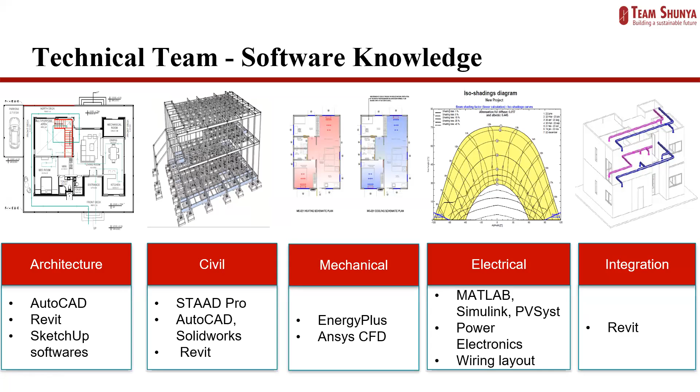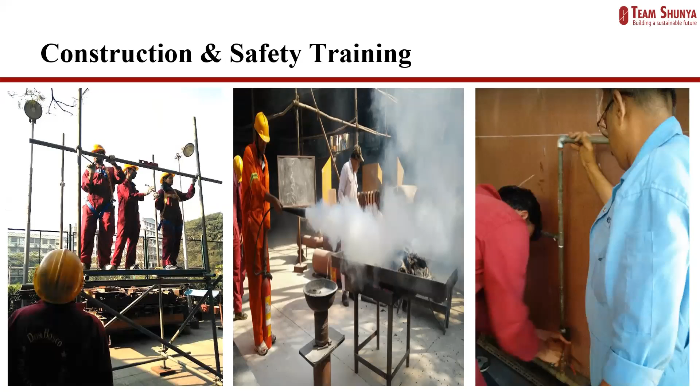And then we run a simulation of the same. Once the simulation part is done, the team members go through construction and safety aspects. Here we can see the implementation part: once the simulation is done, how the construction proceeds and what safety measures need to be taken.

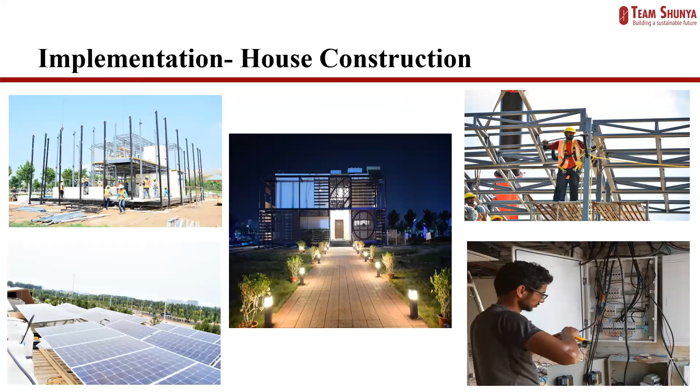The best part of the project is the construction part, and we can say the best experience comes through this particular aspect. Here we see the construction of the 2018 model which we had created.

The next slide will give you a little bit more technical insight on how this evolution has taken place. Early on, our ancestors had a sort of a nest structure.

Basically working on stone and stone tools. Then slowly the evolution moved into using wood, which is a replenishable item - you can still grow trees, right?

So the wooden frames were able to come in a large way, but along with it, you have the dangers that it is susceptible to fire. And it is highly damageable, and it may become unstable over a period of time.

But still, even today, you find wooden structures - they have excellent insulation properties, by the way. And then it evolved to the wooden beam structure, where science and technology gave certain clear cut components to the wood.

Then moving on, you have a combination of masonry and wood structure. Again, it is susceptible to fire, it is again susceptible to damage, it may become unstable in a fire.

Further on, the advent of the steel industry, it's a steel structure and reinforced concrete structures, they all came, right? So you have the mechanized way of construction.

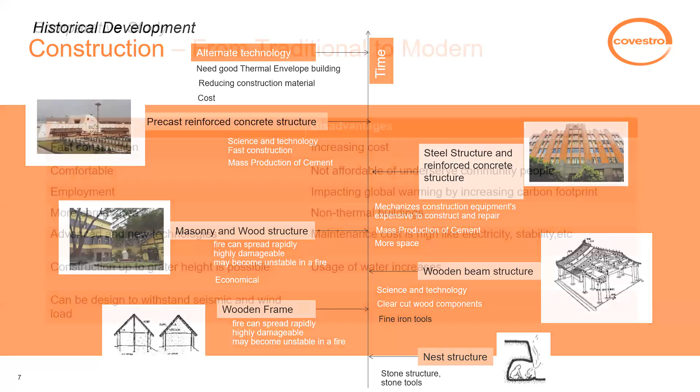So we have also the employment. You need to employ industry. We need to also have a trade-off between high employment and also efficiency. We need more carpet area, value for money, and we also need such advanced new technologies, make things faster, speed of construction, lightweight, and energy efficiency.

Can we have high constructions, high-rise buildings because space is a constraint in urban situations? And can we design to also have the ability to withstand natural disasters which are coming more and more in climatic changes, seismic, wind load, etc.

What are the disadvantages? You have to pay a cost for having these advantages. So the increased cost is there, not affordable to serve those communities which are at a disadvantage themselves. The increasing cost actually excludes certain sets of people, and those people are actually stuck. They're not becoming inclusive in the development of cities, the development of nations.

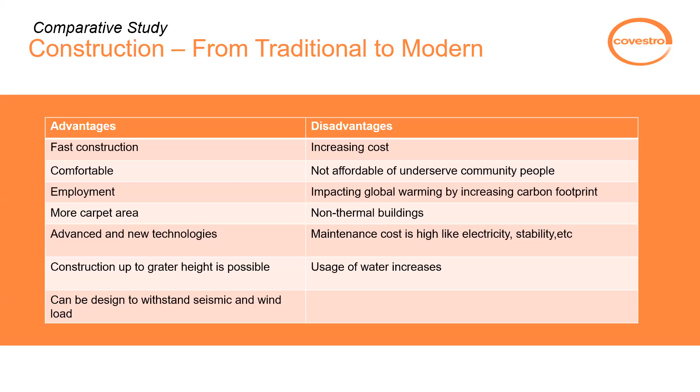So how do you manage this? How do you actually work around this at the same time meet the goals of health and well-being, of sustainability, of functionality, of digitization and customization? These are the questions which alternate technology has to answer. Moving to the next slide.

I'm sure all of you know there is a need and a trend towards life cycle thinking. It is not that the initial cost is what really matters in the life of a building. There are two facts you must remember: the average life of a building in India is less than half that of buildings in Western and more developed nations. That's a very sad fact.

Secondly, this second fact is universal: the initial cost of a building is just 10% of the total life cycle cost of the building. So 90% of the cost comes from operation and maintenance, during the 25, 30, 35, 40 years of its life.

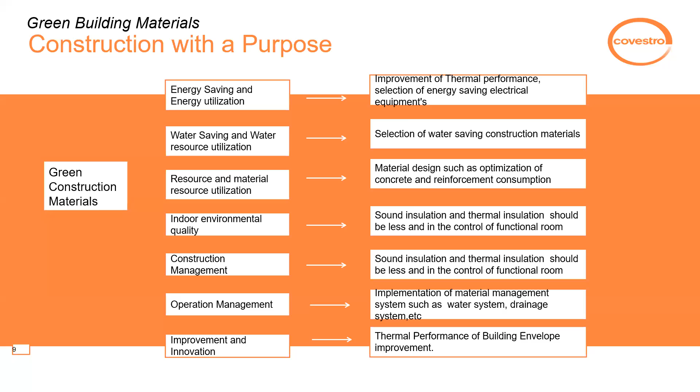Moving on to the next slide. Let's remember, buildings account for 40%, and today the trend is even more—it's touching 50% of the entire global energy consumption. This is a very sobering fact. It makes us think very seriously.

Nearly 50%, that is close to about 42 and more than 42 billion tons of energy units, going into global energy consumption. It is a very sobering fact, and we need to do something about it. When we are building homes and cities, are we generating, operating, and destroying life? We don't know. So let's answer the question.

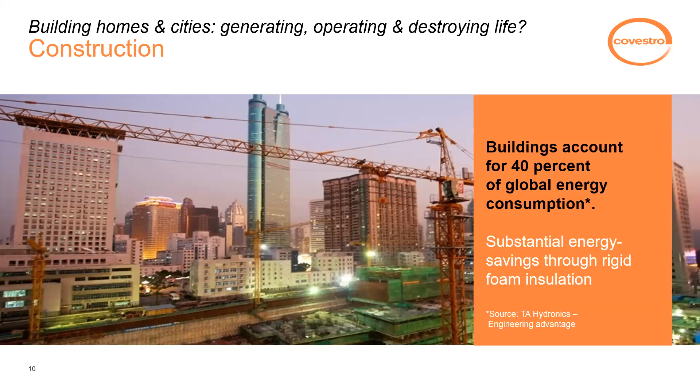Building on the challenges, you have climate change, energy shortage, urbanization, infrastructure need and requirement. For a simple building like what you see here on the right, even a single story building, the HVAC—heating, ventilation, and air conditioning—requirement is more than 50%, nearly 55% of the energy requirement of the building. So where do we actually start making solutions to these challenges, which are sustainable, environmental friendly, and also economic?

So the whole solution goes towards making your buildings address this. We need to have energy savings, enhanced comfort, increased occupant health, and at the same time we need emission reduction. Moving on.

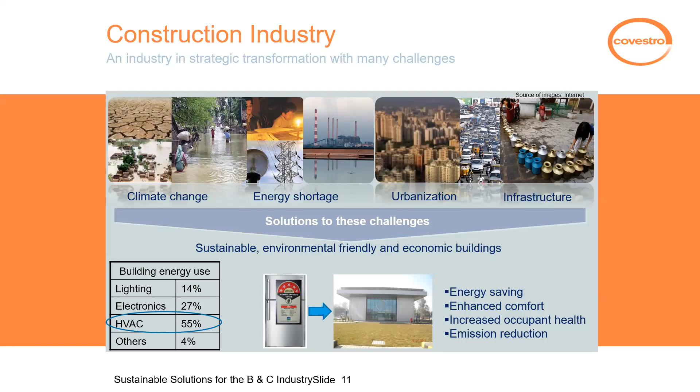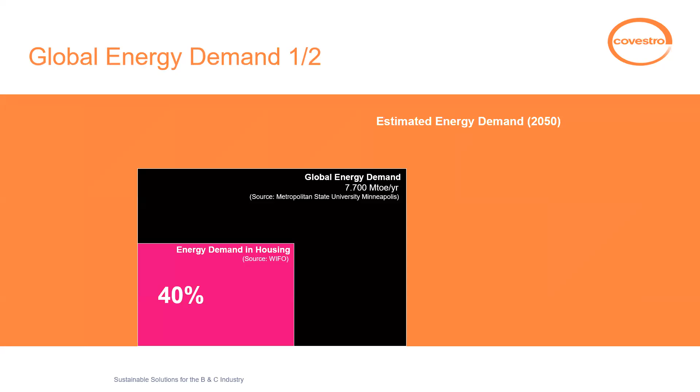This gives you a little more detail on the energy demand. The global energy demand is 7.7 million tons of oil equivalent, and 40% of it is coming from the construction industry alone. In 2050, the next slide will give you how great this demand is going to be.

So there are various solutions available. Insulation is one of the very important solutions. You have heat coming in from the ceiling, coming in from the walls, coming in from the floor, and therefore you need certain materials which can give you savings in terms of the ingress of energy into the building. It's an opportunity which is actually not being taken advantage of in 90% of the buildings in our country. It's a huge economic loss for us.

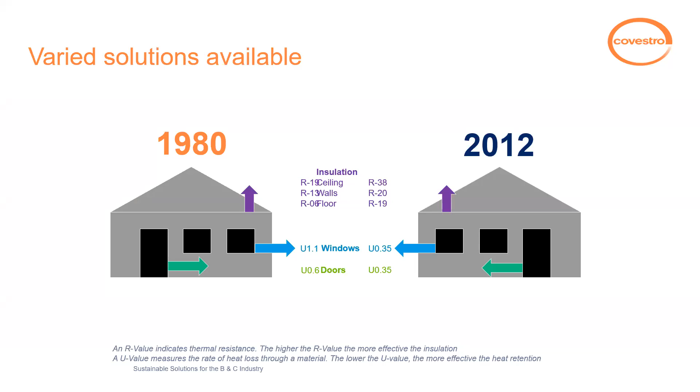Innovations in building materials globally, and then the most relevant for India. Let me move on to this topic. I just want to give you some examples of the innovations which have really transformed, or are continuing to transform, the building industry in the past 50 years or so, when we got into mass scale production of these materials.

One of the important materials is rigid polyurethane foam. It's part of a class of modern insulation materials, and this polyurethane foam is basically one of the best materials due to its very low thermal conductivity, which means its insulating property is the best among existing materials available for commercial utilization today. Because of its high insulating properties, for the minimum space it occupies, it's able to give you the highest value.

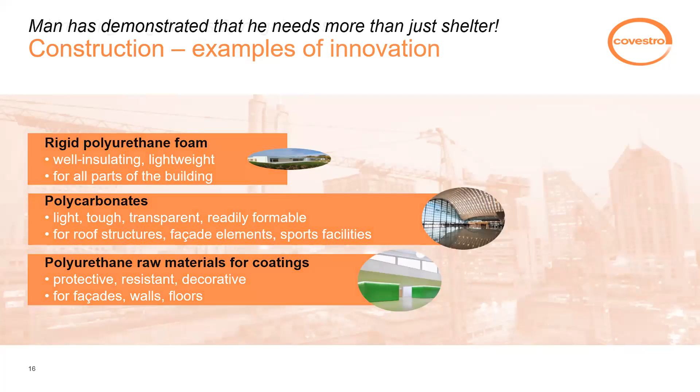The next slide will give you some more ideas of what's happening. The rigid polyurethane foam saves around 70 times more energy during its service life than what is required to produce it.

The oldest available usage or application of this polyurethane insulation has been the Chicago airport, which is nearly 50 years old, and it's still as functional and as aesthetic as it was. Because of its integrity with the concrete structure, it's able to actually bring stability to the entire building.

In Katrina and such disasters, such natural climatic incidents, people resorted to and found refuge in buildings which had this curvature and also the spray foam on it, which actually brought building stability. It was not easily destroyed.

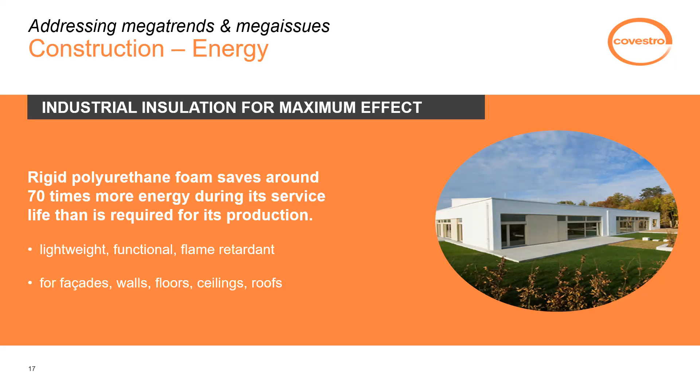So you can have lightweight, functional, flame retardant functionality, and like I mentioned, it can be used in all parts of the building. So this particular polyurethane takes care of the energy aspects.

The next example is about how it is used for low cost, or more technically, affordable construction. These are panels, and in fact, this is a house built based out of Delhi, in one of the places for low income groups. These are panels made out of polyurethane and paper honeycomb.

So these are some sustainable innovations. If you look at it, it will stand out from the rest of the buildings in that lane, and at the same time, it's able to provide thermal comfort, especially in a climate like Delhi, which goes to even 45 degrees plus during summer, and is pretty intensely cold during winter. So you have fast, lightweight, green, energy efficient construction for decent living, and that's something very important for humanity today.

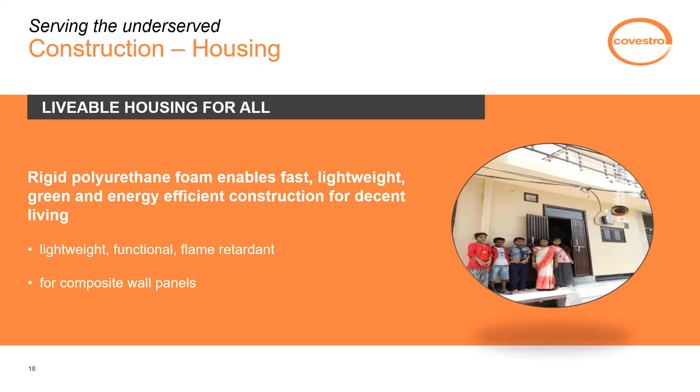Moving on, yeah, architecture has many attractive properties. Sometimes architects get lost in creative design, but at the same time, to marry the aesthetics and the functionality, you need such talented materials. Such talented materials are like what polycarbonate sheets are able to give. The high performance plastic polycarbonate allows creative design and offers functional advantages, giving all the advantageous properties and making the world a brighter place. Right, next.

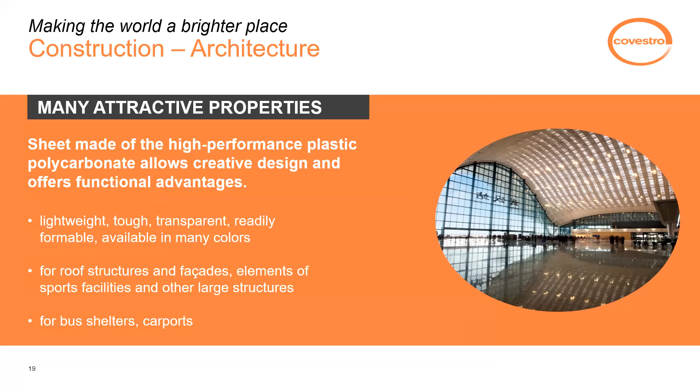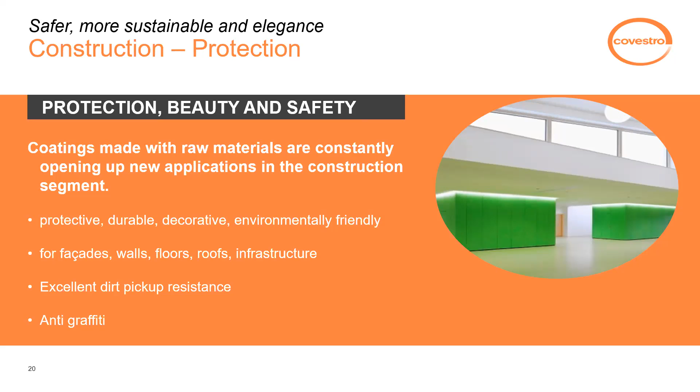Protection, beauty, and safety come through the protective materials. The coatings made with high performance raw materials are opening up new applications and give you a very healthy building. In fact, one of the problems with today's buildings is what they call sick buildings, caused by the volatile organic compounds coming out of materials used for coatings, which are very harmful and cause sickness in the inhabitants. But we have this new genre of materials based on water, water-based chemicals, coatings and dispersions, which give you a very healthy building, not only for the people who are there but also the constant users who come and go. At the same time, they offer excellent dirt pickup resistance and also anti-graffiti features.

What is anti-graffiti? Next slide. It's able to quickly remove whatever damages or influence from all kinds of people who are there, especially in public places where vandalism is one of the major problems, also in our country.

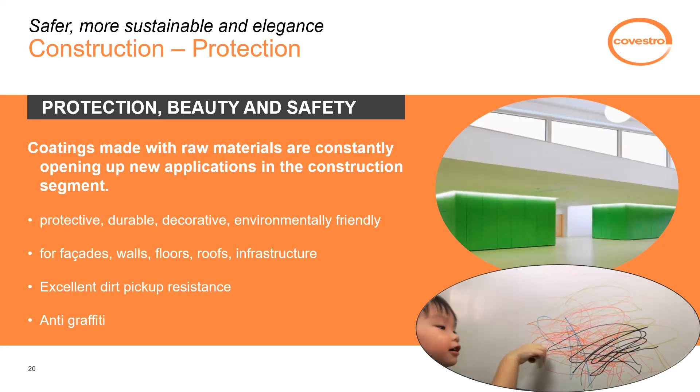Moving on, let me speed up a little since we may be running out of time. Industry and society, that means the people, require, technically, low emission buildings. They require energy efficient architecture—not just aesthetics, but functional. Sustainable solutions. They need modular systems.

On the right hand side you find this G+3 structure, made in cooperation with the Rajasthan Housing Board in Jaipur. This building has been made entirely with polyisocyanurate wall panels. These are high performance panels giving extremely good heat resistance, flame resistance, fire resistance, while also giving thermal conductivity control. Needless to say, it takes care of all the other basic properties related to safety and load bearing features. This is basically an RCC structure, not steel, and the panels are just sitting on the framework.

On the bottom you find a dharamshala from one of the NGOs that takes care of tribal girls in Gujarat—it's a dining hall for them. This is again a fantastic innovation where cement fiber boards are sandwiched with polyurethane foam and paper honeycomb. You may ask, what is paper honeycomb? It has unique features—load-bearing features, and it's fire resistant because the cellular structure does not allow flame to spread. It has inherent termite resistance, and it is lightweight, giving a very good structure. Along with the polyurethane foam, it gives a very good innovation.

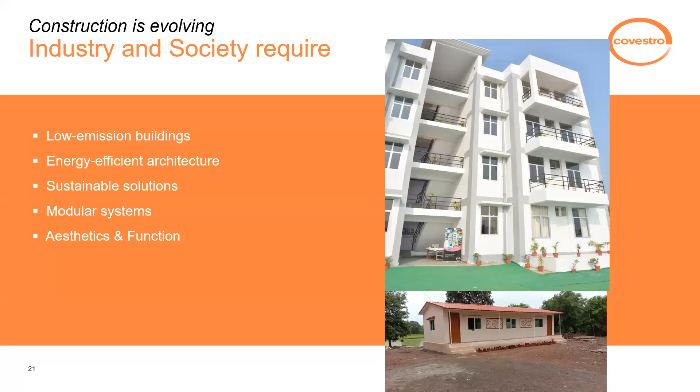All this shows there is a continual innovation process going on in the construction industry. There are breakthroughs—the construction industry is riding on breakthrough innovations addressing those five important features I mentioned at the beginning. You have pollution absorbing bricks, cooling systems in bricks themselves, self-healing concrete, not only concrete but also self-healing coatings, and CABKOMA strand rods which give excellent strength.

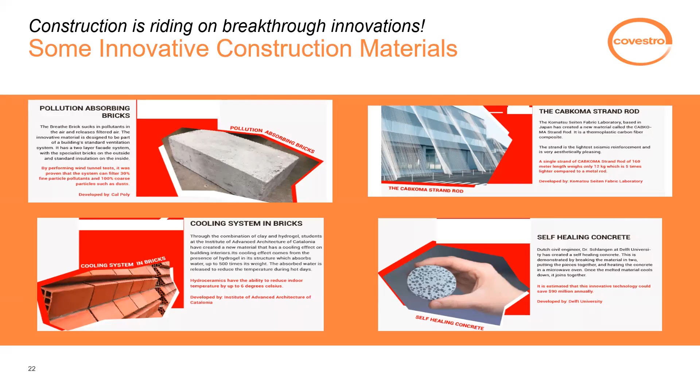Now we need to relate all this to the sustainable development goals. And let me assure you that sustainable construction is inclusive and profitable.

Sustainable is affordable. There are many sustainable development goals which were formed from 2015 onwards. They are given as goals and targets for countries and companies, and need to be fulfilled by 2030. We may not reach all the goals because of various challenges we're facing, but these are solutions. These are the goals which are really driving innovations so that the solutions are able to come and meet.

Now let me tell you one fact, you must remember this. The first Millennium Development Goals, formulated in 2000 and finished in 2015, brought 1 billion people out of poverty. The MDGs brought 1 billion people out of poverty. Whether you like it or not, 80% of them were purely due to China. The development activities taken by China on such a massive global scale were sufficient for bringing 80% of the 1 billion people out of poverty.

Again, you could spend a lot of time on this, but what I wanted to say is sustainable construction does not ignore people and planet while it makes profit. When you look at the three P's, today many companies have a triple P bottom line. They don't just look at profit, but they look at people, planet, and profit. For companies, there are many in the world which really live the principle that I can be neutral in one and positive in the other two, but I can never be negative on any one of the three.

So there is definitely a very convincing argument that the triple P bottom line needs to be the norm in order to have alignment to the SDGs. You can go on into all 17 SDGs, and construction is related very closely to all of them - ensuring health, safety, designing and constructing resilient infrastructure that can withstand climate change, mitigating the risks of climate change. Then use the provisions of sustainable built environment like bridges and roads, etc., in developing countries as a driver for global partnerships. Partnerships is one of the very important aspects of the sustainable development goals. In fact, SDG 17

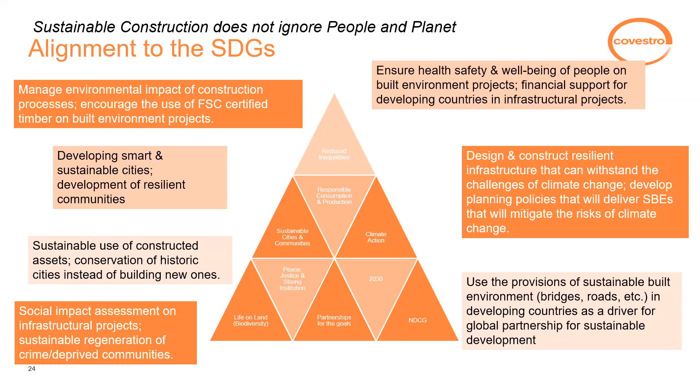So manage environmental impact of construction processes. How do we also take care of the forest resources? So sustainable construction takes care of the triple P bottom line. Next slide.

Big question: is it going to increase my construction cost? Now, I already told you about the life cycle thinking paradigm that we all should enter into, because that's the one which really reflects the true cost.

Here's an example of an alternate technology which has helped us. I mentioned the Rajasthan Housing Board example in Jaipur. You see a design where lightweight panels have replaced the brick walls.

This has triggered savings in concrete, savings in reinforcement, and increased carpet area. The number of columns has reduced from 34 to 26, the number of beams has reduced, the size of the columns has reduced, and the grade and quality of the building reinforcement concrete is also different.

You have 37% savings in reinforcement, 13% savings in concrete, and at the same time an increase in carpet area. Doesn't this make sense? Very importantly, many times we do not factor in the time cost. Here, we are able to do it in 60 to 70% of the traditional or conventional time required. So this is a living example.

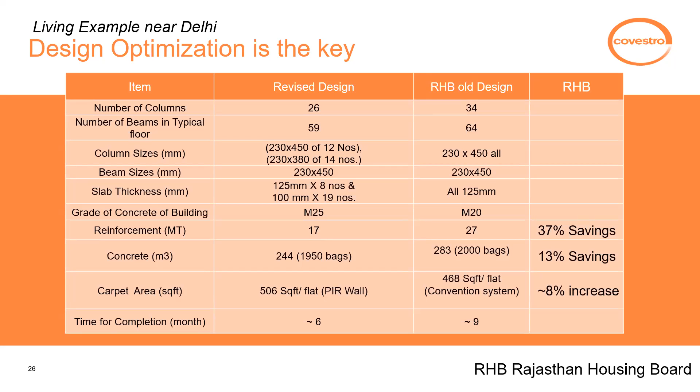Next slide. Now, just to help the building and construction industry, there is this forum called the India Insulation Forum. I want to quickly introduce the India IIF to you. This forum has a number of companies across all kinds of materials, multinationals and also local Indian companies, basically focused on bringing to reality the benefits of good insulation.

So the U value in the roof and the wall U value are so high when you have business-as-usual construction without insulation. While you want to shift to a simple Energy Conservation Building Code, that's ECBC, which takes care of the insulation. This has been set by the Government of India, the Bureau of Energy Efficiency, and you just have to comply to it. You see the dramatic fall in the U value of the roof and the wall.

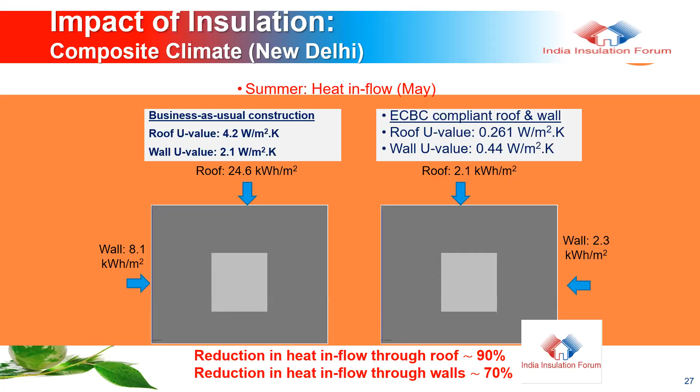Next, I just want to run you through some innovation examples which are touchable, which are seeable. You can visit and see them, and make your comment. I already mentioned this PIR technology, Rajasthan Housing Board construction, G+3 in Jaipur. You can go and see it, you're welcome to visit and study it.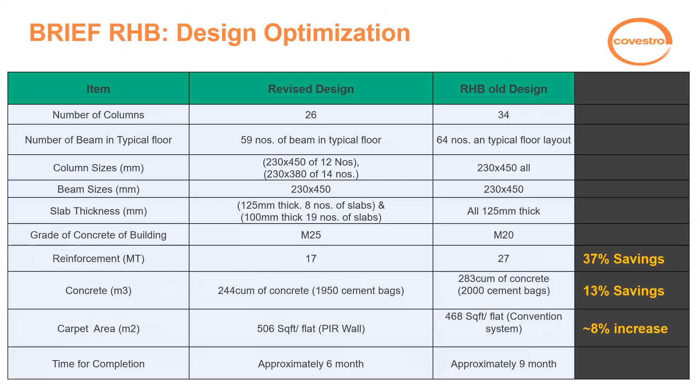This has also been tested by MNIT in Jaipur, so they have given this certification. I already mentioned this, we can move to the next - sorry, there's a repeat.

These are all structures built using prefab panels. This Mandi location is at high altitude in Himachal Pradesh - this is basically the IIT there, built entirely using prefab panels. Insulation gives you thermal comfort whether it's hot or cold. Because of the resource efficiency, instead of taking brick and so many other heavy materials up, all that is avoided - you take lightweight material up, and you do it so fast, saving a lot of time and energy.

At the same time you have durability, design, and endurance. You have some more pictures of that, other places like this. You can move to the next slide.

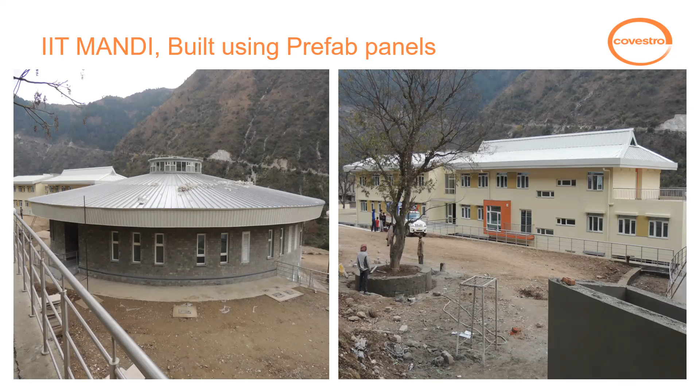NTPC, the National Thermal Power Corporation, Joshimath.

All these are made on alternate technology of prefab panels.

This is a very unique innovation, a 50-bed hospital by one of the companies called Strawcture Eco. While they have used polyurethane roof panels, the walls are made out of agri fiber.

They are made out of waste content, and this high silica content gives you fantastic fire resistant properties. They are compacted using binders and certain adhesives, and they're able to give you a very good structural element. So it gives you a huge opportunity to achieve circular economy.

Today, in fact in Delhi, the stubble burning season has started. This is actually a solution to break that cycle of burning stubble, and this hospital used it.

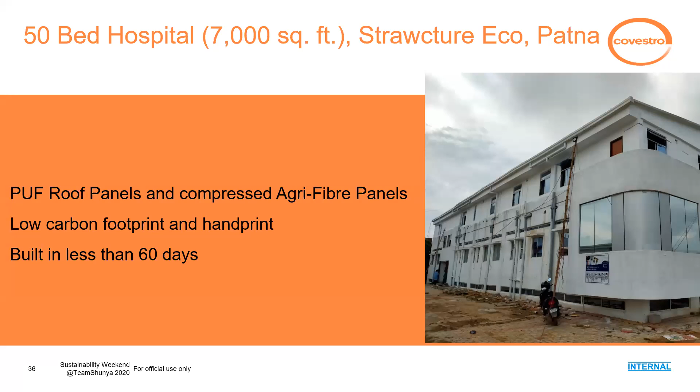You can see a closer view of the wall panels. These are the panels, and they perfectly meet both the function and the aesthetics. They can be finished just like a normal wall.

Remember, all these were built in less than two months. A 7,000 square foot, 50-bed hospital in a place like Patna was built in less than 60 days. I think that is really appreciable.

This is a global scale hospital built in Iraq, a 400-bed hospital. It has a basement plus ground floor and a 16-story reinforced concrete structure with polyurethane panels. It is a very large area, 18,000 square meters.

And it took about 5 years. But it shows and demonstrates the capabilities of alternate technologies. It is not just related to housing, nice dharamshalas, or universities and colleges. You can have world-class structures coming out of such alternate technologies. Maybe India is a little bit behind, but the world is progressing, and we have to catch up.

This is a certificate from there, from the Turkish consulate in Basra.

Now let's get back home. This is one of the first buildings in India, way back in 2011, when it was completed. At that time, it was the highest LEED platinum rated building in the world.

We wanted to build a net zero energy building, but we ended up creating a net positive building. It was generating more energy than it was consuming. How? When you move to the next slide, you'll understand.

That has been a classic. We had similar buildings in Germany, US, Japan, China, Thailand, and also in India. This one is found in Greater Noida. You can again visit this place. It's a fantastic demonstration of how materials can actually play a solid role in sustainability.

These are the various places where we built them. And actually, a net zero building, like I mentioned, at that time was it a dream or could it be real? Yeah, it became real. In all these places, it became real.

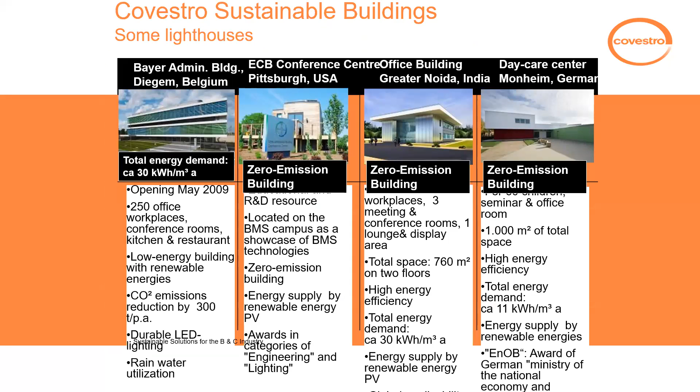First of its kind, completed in 2011. Of course, now the platinum rating has all been changed - that rating system has also evolved. But at that time, it was the highest LEED rated building. So you see the energy efficiency, a remarkable 70% less consumption versus conventional.

So we had solutions in insulation, we had in waterproofing, we had in coatings.

So it had all these solutions. It had polyurethane foam for high and low temperature insulation. In fact, the whole building was enveloped using polyurethane foam. It also had lightweight, stable, and transparent polycarbonate sheets, replacing glass. Then it had photovoltaic cells on the roof, LED and smart energy metering, and cabling coming out of polycarbonate blends. We had coatings, adhesives, and paints which are basically low and zero volatile organic compound, and LED and other interior lighting solutions.

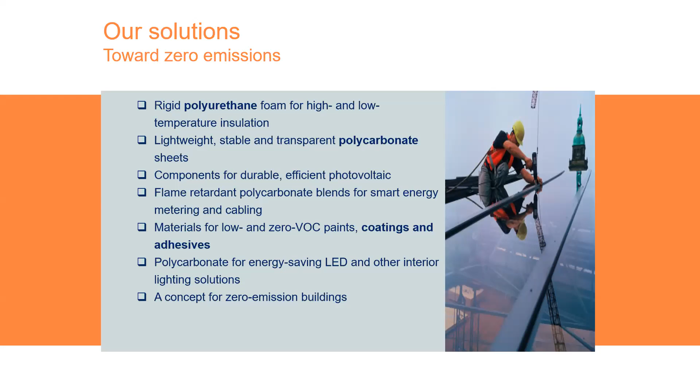We were able to intervene through sustainable materials in waterproofing, in insulation, including the floor, side walls and the roof, everywhere. Then we had also the security door, which was a replacement of glass. In fact today, you find the partitions also are made of polycarbonate. Whether you go to a hotel today or to the Parliament House, because of COVID, you have these transparent sheets coming in place, and they are polycarbonate, even in cars. So partitions, railing, polycarbonate replacement of glass, doors, protective coatings, wood coatings, wall coatings, and protective coatings.

So all these have been interventions, solutions of sustainability.

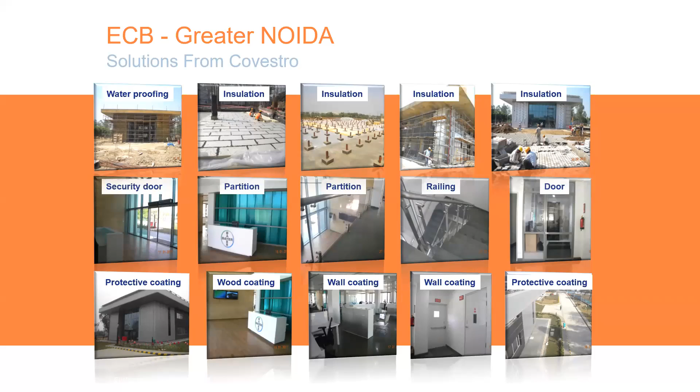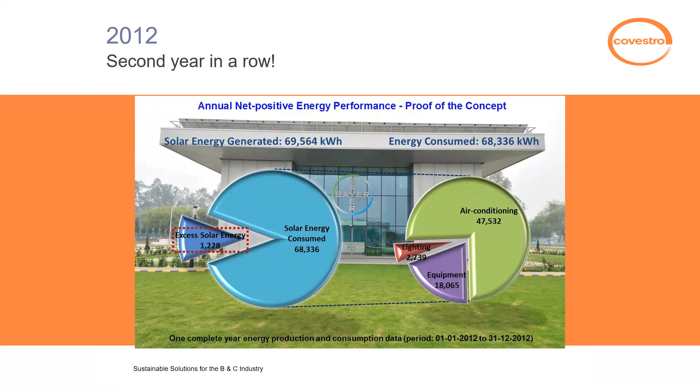Like I mentioned, the net positivity just came year after year. I don't want to show you all the years, but you can quickly go through these to the next slides. Three years hat trick net positive. It still continues, I must say.

Let me just quickly finish with the last two slides, and then the video can be played.

So Covestro, the company where I come from, is a world leader and inventor of plastics. 14.6 billion in sales last year, nearly 17,000 employees, listed in Frankfurt, DAX. It has a large portfolio of products and solutions for many industries, including automotive, furniture, footwear, and of course the construction industry. A highly innovative company with about 1,000 employees purely engaged in research and development. We are an 80-year-old startup, I must say.

We have 30 sites across the world, and also 3 in India, one in Ankleshwar, another in Cuddalore, and another of course in Greater Noida. So we are close to the markets, very customer centric, and we work with suppliers very closely.

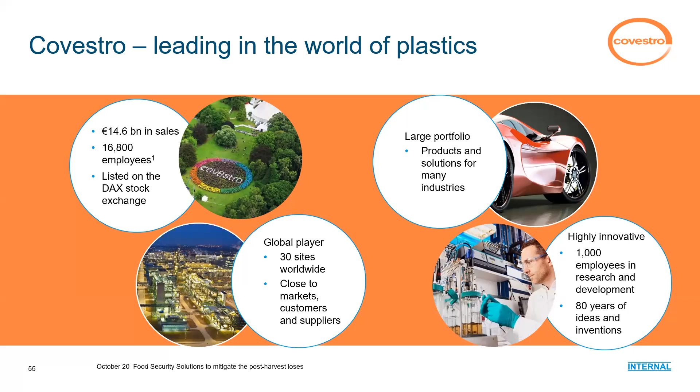Our vision for a brighter world. We want to make the world a brighter place with innovative products and solutions for more sustainability. So we've pushed the boundaries of what is possible.

Particularly where I come from, the business is called inclusive business. This is where we develop and deploy solutions to underserved communities. We work along with governments, both central and state, along with NGOs, and along with our implementation partners, bringing solutions required for housing security, affordable housing, food security, preventing the loss of fruits and vegetables, which today is nearly 20% lost, and of course water. So we are looking at these three fundamental requirements for the common man, and we see how our solutions can be brought using the available ecosystem and also by creating new ecosystems, to make sure the underserved communities are reached with such solutions.

Like I said, we are very keen to play a part in bringing those SDGs into reality, which means we are very keen to bring people out of poverty, and that India plays a key role in bringing people out of poverty. So that's where I want to stop.